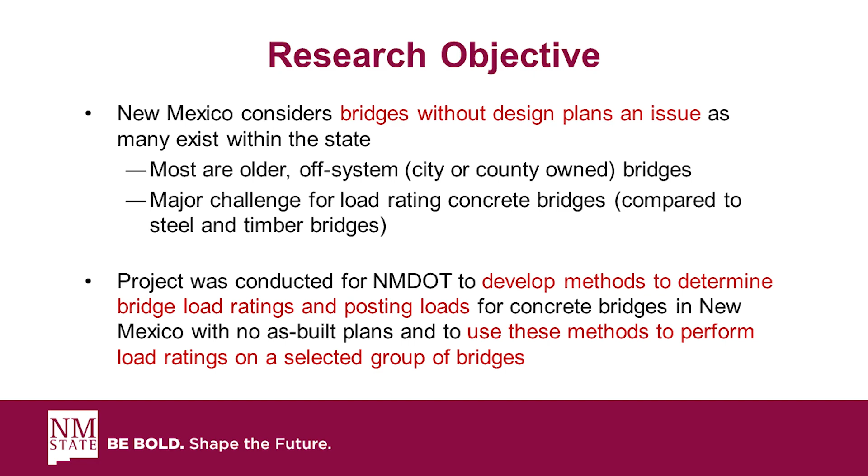The one thing we did do, we talked to New Mexico, and they considered bridges without design plans to be a major issue. Most of these bridges were older, off-system bridges, as I mentioned before. The major challenge rose with load rating concrete bridges without plans, and as you can imagine, it's because we don't know what the reinforcement is - it's hidden, and so that was a major challenge.

Bridges such as steel and timber are a lot easier to load rate because you can go out to a bridge site and measure the dimensions. You can go back to historical documentation and get a good feel for what the bridge is.

So what we looked at - we did some literature reviews, and during my time at the University of Texas at Austin doing bridge testing research, we found that a lot of state DOTs have made headway in testing bridges: diagnostic testing and proof testing. For those not familiar with those terms, diagnostic testing involves doing a load test at a lower truck load and then calibrating a finite element model. The issue is that when you calibrate the model at a lower load and extrapolate to a higher load...

Things like fixed bearings - that's a big thing whenever you're load rating bridges. Fixed bearings can actually contribute to load distribution, but it might not be there at a higher load level. So for pre-stressed concrete, we were looking at not only diagnostic testing but also proof testing, which essentially is loading at a much higher level and proving the bridge can carry a particular load.

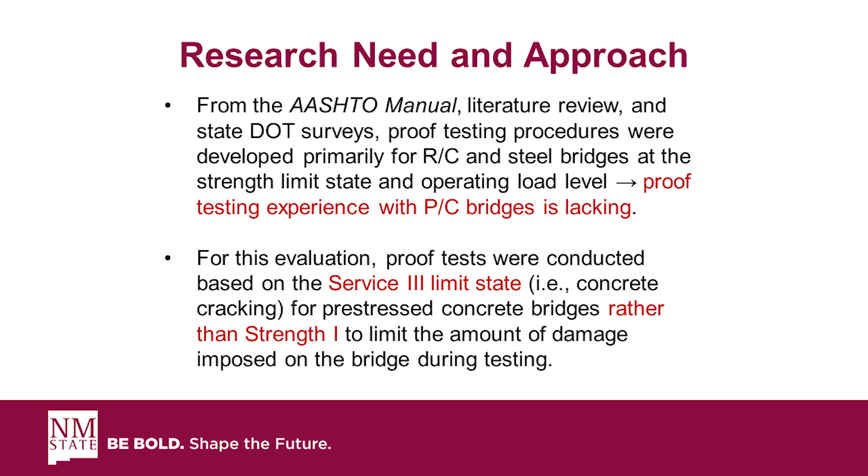The problem with prestressed concrete bridges, though, is that we don't want to load past the concrete cracking strength. That was the big issue for us, because the bridges we were inspecting didn't have cracks, and we didn't want to load past that serviceability limit state. So that's where we concentrated our load testing - we did all our proof testing based on Service 3, then extrapolated to Strength 1. I'll illustrate this with a case study we did.

Okay, so let's talk first about the general procedure that we followed.

Since we don't know what the reinforcement is, we estimated the amount of prestressing strands using Magnel diagrams - basically getting an estimate based on what an engineer would come up with in terms of prestressing strand estimates.

We then used a ferroscan, scanning the side of the beams to see what we could see inside as far as reinforcement. One of the challenges we had was that whenever you have 7-wire strand in prestressed concrete members, the ferroscan does not work as well as when you're looking for mild reinforcement. The strand pattern itself really creates some issues in getting the results.

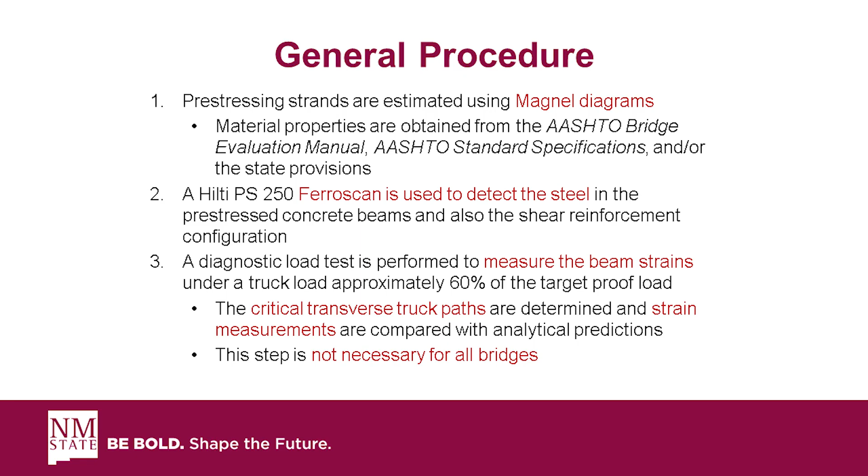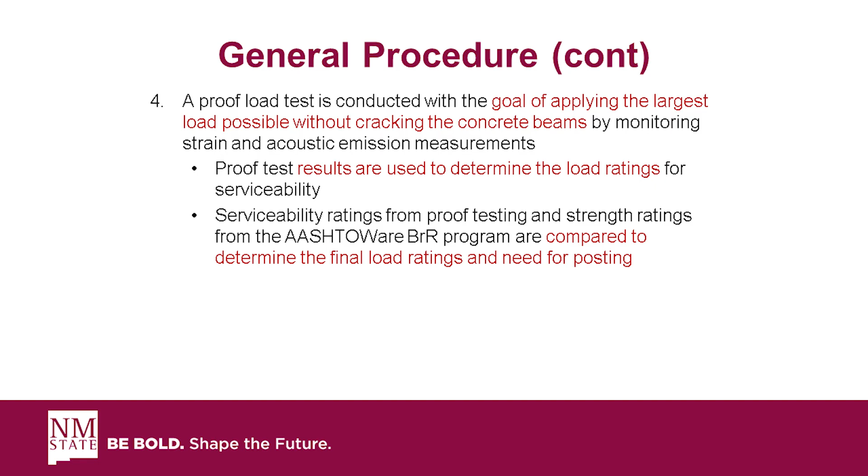Then again, we do our proof test, making sure we're monitoring the bridge behavior to ensure we're not going to get any cracking. Based off those proof test results, we're able to load rate the structure.

As far as bridges without plans, at the time of this study, back in about 2016-2017, approximately 10% of bridges in the US had no design plans - about 650,000 bridges located throughout the country, so that's about 60 to 70,000 bridges without design plans.

The ones we have here in New Mexico that fell into this category were T-beam bridges, box beam bridges, and I-girder bridges - you can see those listed here.

I'm going to be focusing mainly on Bridge 7701, which in this particular case experienced the most damage. Particularly, between the tops of the beams they had a shear key, and those were all damaged. As pointed out earlier in a talk on the UHPC retrofit of shear keys, in this case the shear keys were not even that well designed, which created some challenges for us when we load tested.

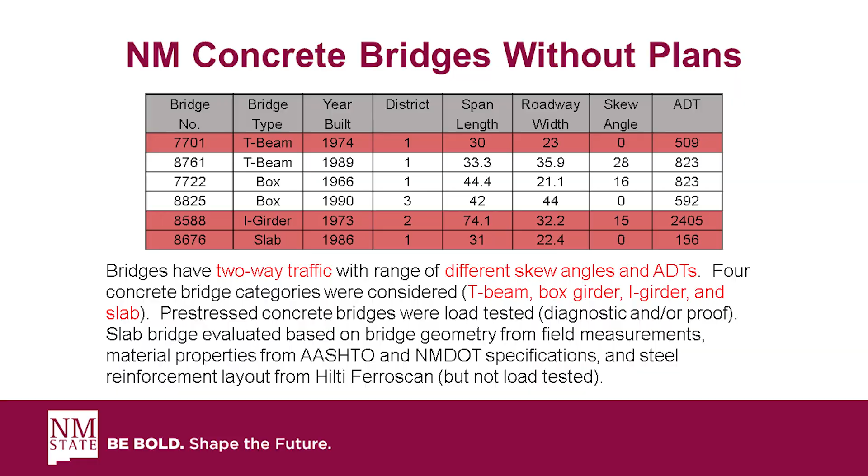We also did slab bridges - that's number 8676 towards the bottom there. For that one we were actually able to get a very good estimate of the reinforcement and load rate the bridge using the bridge rating program, BrR, the AASHTO program. I do have some publications at the end of this talk, so you can follow up if you're interested.

All right, so let's get right into it. Bridge 7701 was actually located in District 1, close to Las Cruces, New Mexico. This is a single-span prestressed concrete bridge, about 30 feet, and it has 9 T-beams.

We have shear keys located on the top of the beams, with 7 keys located along the length. As pointed out earlier, with the UHPC, it kind of corresponds to those staples going along the length of the girders. In this case, however, it was a very basic design.

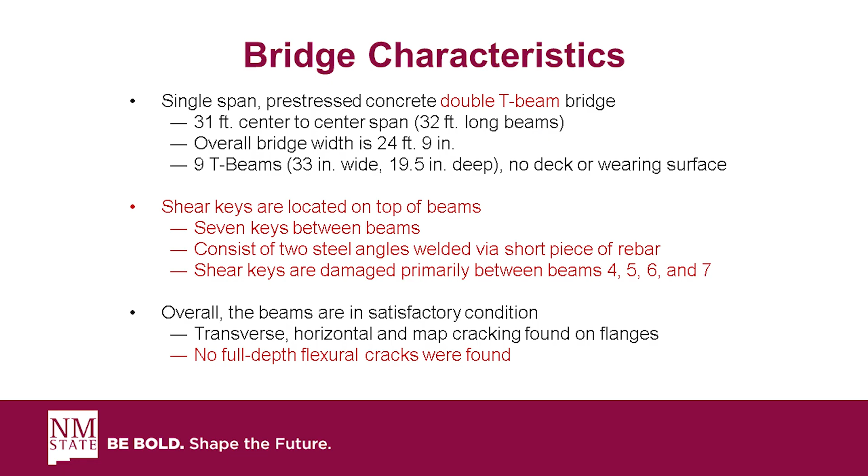It just included 2 steel angles with a rebar welded in between those two channels. We did a full depth inspection and found that the beams were all in satisfactory condition, and most importantly, no full depth flexural cracks were found, and obviously we didn't want to cause any new ones. So that was a big part of our plan.

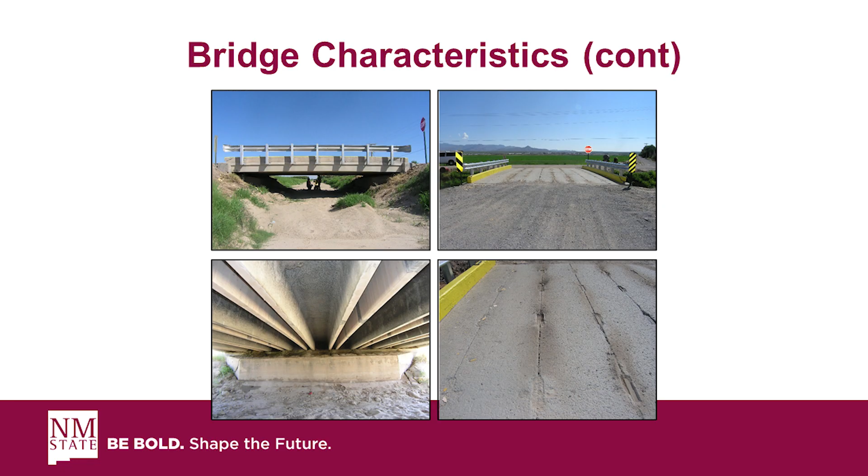So here are a couple of pictures. You can see the elevation view, but if you look on the bottom right, you see those pockets. Those are where the steel angles are located, and there was a rebar right between the 2 steel angles. On several of these bridges, it was broken.

So this particular study was focused on what is the load capacity of this bridge. A lot of them are located in agricultural areas where they're going over a canal, and a lot of farm equipment is being used to go over these structures. We needed to know what the load capacity is.

Moving on to the estimate of the pre-stressing strands, we looked at coming up with an estimate based on 4 conditions. If you look at the first equation, that is the force in the pre-stressing strand as a function of eccentricity, based on the stress at the bottom of the beam at transfer. So we're able to come up with a force estimate as a function of eccentricity.

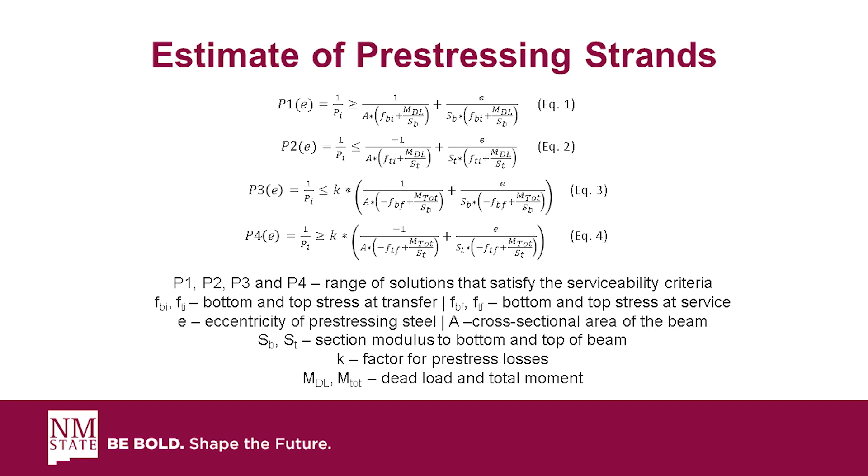The second equation is at the top of the beam at release, and P3 and P4 are at the bottom of the beam at service and on the top of the beam at service. The K factor is the factor we use for pre-stress losses, and for these tests we assumed 25% pre-stress losses for service.

These are the resulting lines. You see P1, which is our blue line. That is the estimate on the vertical scale, which is 1 over the pre-stressing force. So as you go higher in that quantity, you're actually getting a larger pre-stressing force, because you're going 1 over that value.

So if we bind that value, this is the region where you have pre-stressing force with eccentricity. The top point corresponds to the lowest pre-stress and the highest eccentricity. So how do we accomplish the lowest pre-stressing force? It's by putting as much of the steel away from the center of gravity as possible.

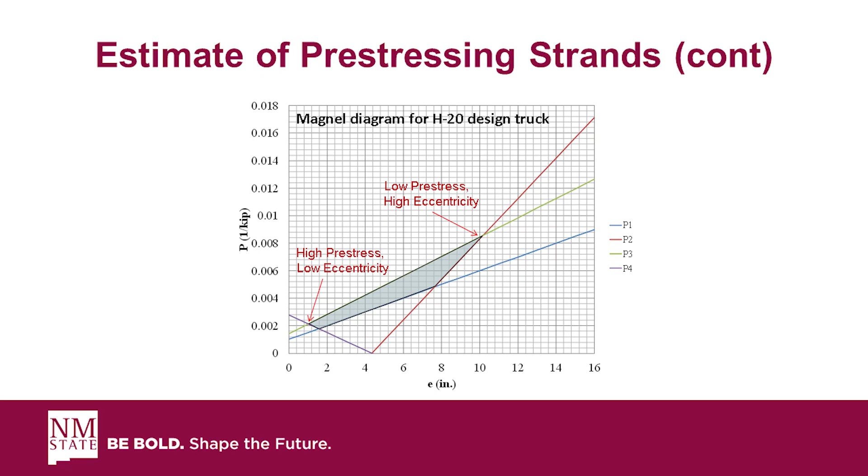So for pre-stressed concrete members, for example a bulb T, you want to start filling all the rows towards the bottom of the cross section and then moving up. So in this case, the higher the eccentricity, the lower the pre-stressing force. The bottom point represents the higher pre-stress and the low eccentricity. So really design is usually on the top point, the lower pre-stress and the high eccentricity.

So these are the results. We did this analysis based on HS20 loading, H20 loading, and also H15. The numbers that you see in red correspond to H20. Let's just go through those numbers.

If you look at the first number, the 8.56, that goes back to the previous slide, looking at that low pre-stress force. If you go to 1 over Pi, that is the 8.56. If we take an inverse of that, that means we need about 117 kips of force, and this is the amount of force you need to satisfy Service 3.

From there, we can move on and come up with the area of steel required, determined by dividing that force by 70% of FPU, which is basically the amount of stress you can put on the cable at transfer. We come up with 0.618, and if we divide that by 0.153, which is the area of a half-inch diameter strand, we come up with an estimate of 4 strands. So we really just back-engineered it to say that we need at least 4 strands.

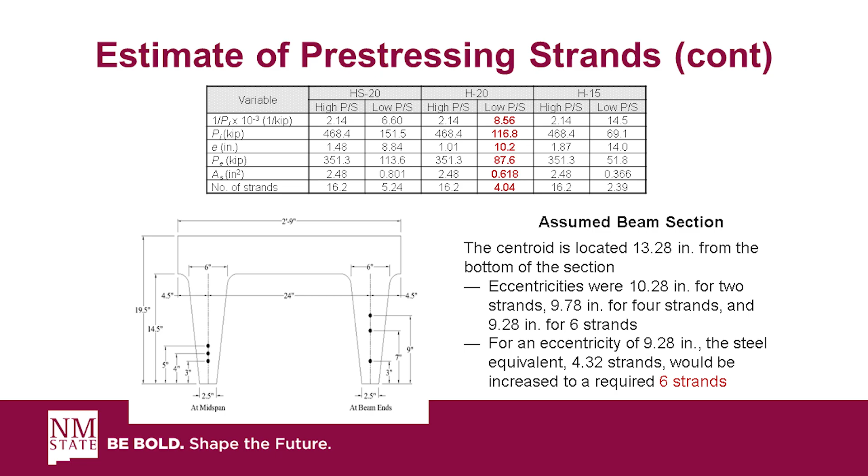With that value, what we did next is we did a scan of the beam using the Ferroscan. If you look at point B, that corresponds to the bottom of the beam, and that dark area you see is 3 strands that are bundled together.

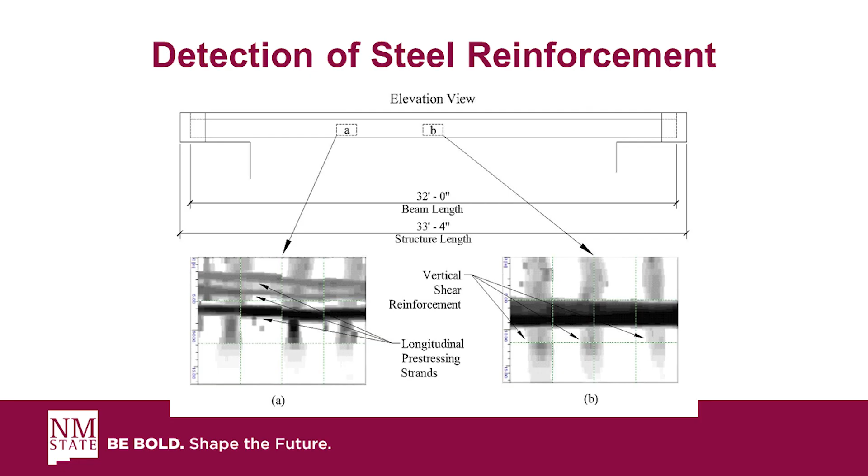As you move away from the center line towards the end of the beam, you get harping of the strand. You can see on the left the 3 strands that are separating. Going back to the previous slide, we said we needed 4 strands, but you're going to need a little more than that, so it could be 2 strands in each stem. We actually went up to 3 strands, and that's what we used as the estimate. So now we have a good picture of what the reinforcement is.

Now that we have the number of strands, estimated at 6, we were able to start preparing for our load test. We first determined the amount of moment that would cause cracking of the beam. We estimated the dead load moment based on the size of the beam itself, and taking the difference of those two, we figured out the available moment we can apply to this bridge with a truckload.

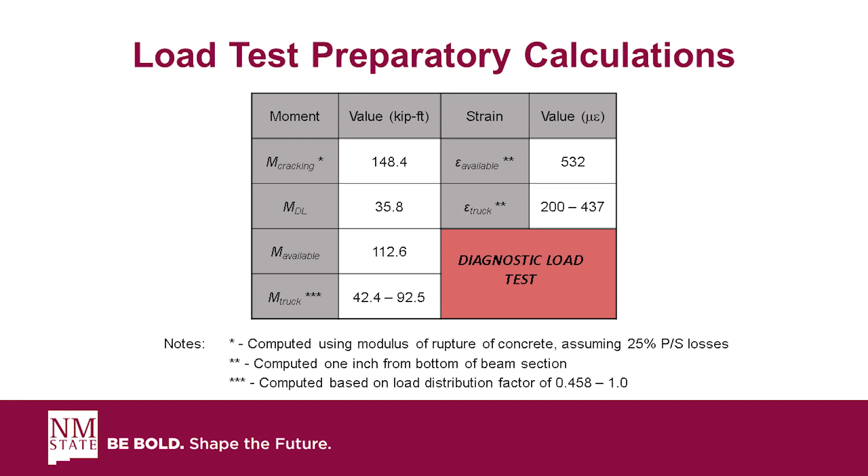It's about 112, 113 kip feet. The truck itself in our diagnostic test was going to range between 42.4 and 92.5 kip feet. The lower number is based on the distribution factor from the AASHTO specification, basically taking that 92.5 number times the distribution factor from AASHTO, shown here to be about 0.45. So just think of it like each beam taking 45% of the load.

We also did that estimate based on a distribution factor of 1. That goes back to what was mentioned earlier about the shear keys. When they're broken, each individual beam acts independently. So if you're looking at a wheel line, that beam takes load and doesn't distribute any load to the adjacent beams. That actually happened on this load test on a couple of different beams.

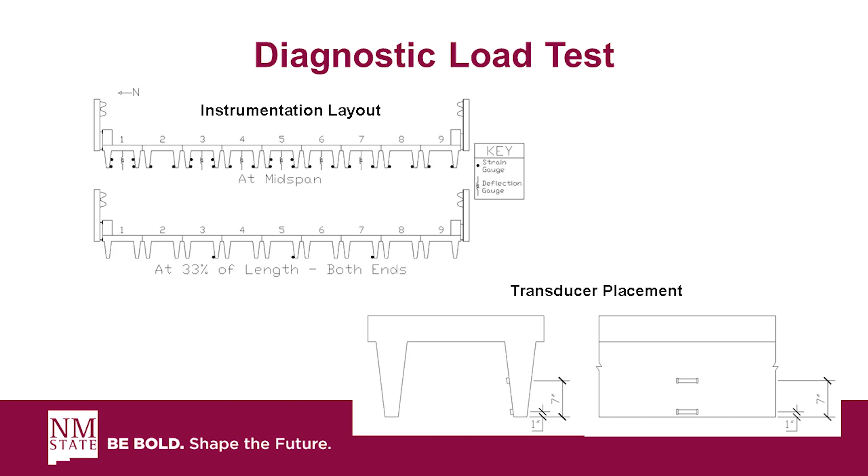This is the cross section of the beam where we put instrumentation. All those individual circles you see are where we put a strain gauge. We wanted to make sure we were monitoring each individual beam under the truckload we were going to apply. At certain locations we also put a strain gauge on the height of the beam, because we wanted to come up with a strain profile and estimate where the neutral axis was. That tells us if we had a gross section or a cracked section, and it confirmed that we had a gross section.

This is where the truckloads were positioned. If you see path 5 and path 7, you see the 2 arrows pushing down there - those are the 2 loads from the front axle, 2 wheels, 2 loads going down. So we drove the truck onto the bridge just with the front axle. Then on pass 1 and 5, and pass 3 and 7 on the second phase, we backed the truck up, gradually applying larger loads.

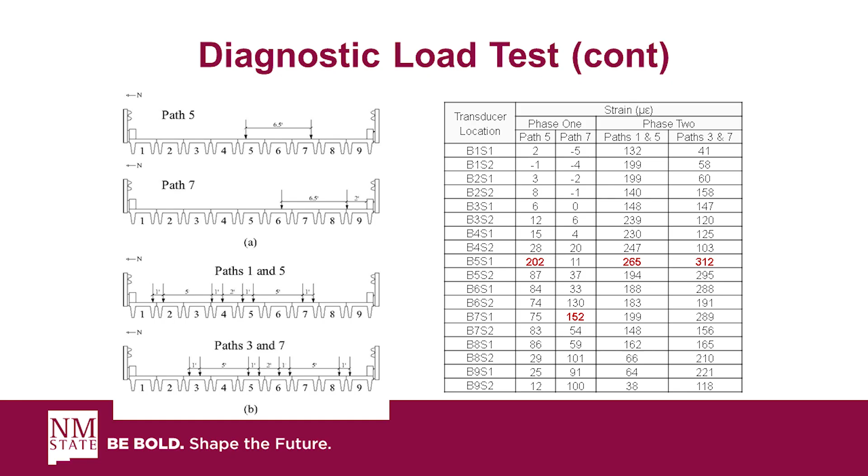Going back to the preparatory calculations, we had estimated the amount of strain available before cracking was 530, so we made sure the strain levels never exceeded that. Let's go back to the results here: we got up to about 312 micro strain, well below the 530 that would cause cracking. So we felt comfortable with this diagnostic load test.

And then we moved on to the proof test. We changed our instrumentation and identified 4 beams that were really taking up a lot of the load because of the damaged shear keys, and we instrumented heavily in those areas. We put a strain gauge on each side of the stem, so that way we made sure we were capturing the strain differential across the stem. We wanted to make sure we did not crack the beam.

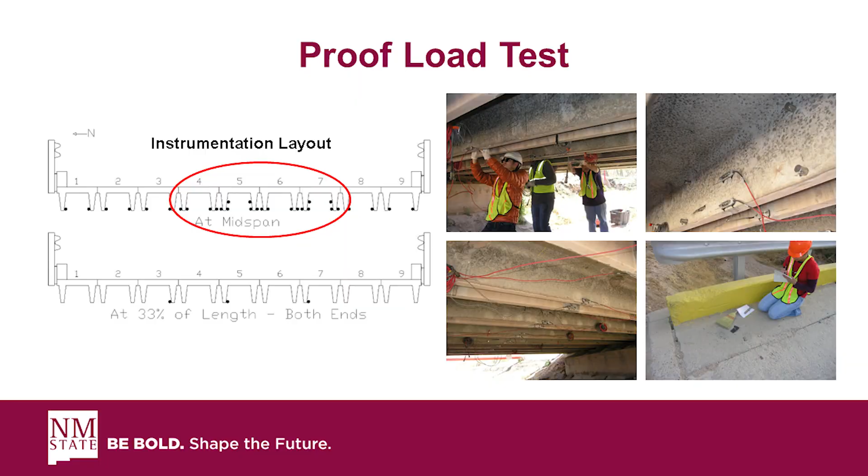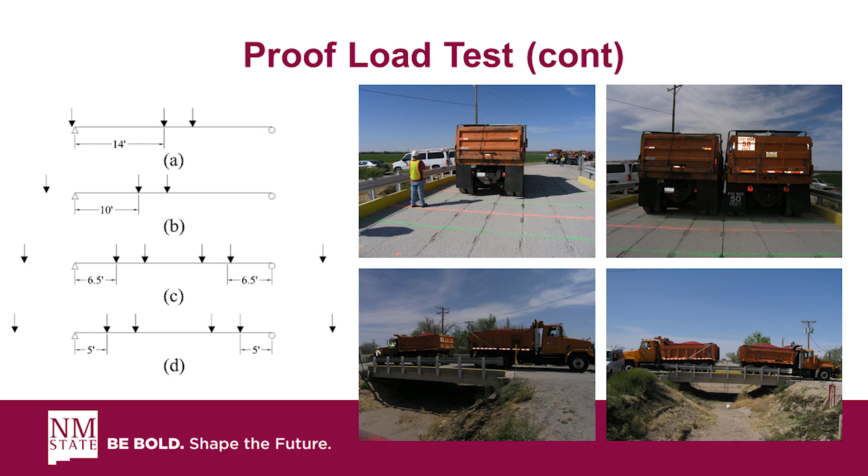Bottom left would be 2 trucks back to back, and the bottom right is 4 trucks on the bridge. This is the largest load this bridge has ever seen. On phase 1, on the left, we were able to back up the truck all the way up to 14 feet, all the way to the middle.

On 2 trucks back to back, we were only able to go up to 10 feet. We stopped the truck because we had already gotten close to the available strain. On phase 3, we were only able to get to 6.5 feet, and on phase 4, we were only able to get to 5 feet, where we started getting close to the cracking strain.

Another thing we made sure we did is we wanted to make sure we did not fail the beam in shear. There was an equation given in NCHRP report 549, simplified design procedures for pre-stressed concrete members. They come up with an estimate of VCW, which is the cracking load for the web. We estimated that the amount of force required to crack the beam was somewhere between 27 and 42 kips. Our largest applied load was estimated to be about 26 kips. So that gave us extra assurance that we weren't going to crack the beam in shear.

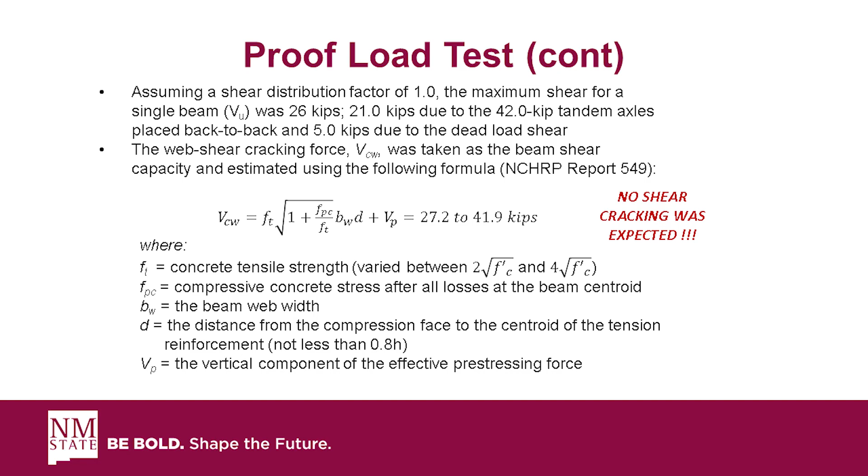One thing I want to get across is that we made several checks. We were looking at checks for flexure, for cracking, for shear, and all of this took a great deal of investigation to feel confident that we were not going to get anything unexpected.

Going back to this, we also had to console the truck drivers when they were backing up the truck, because the beams were deflecting so much that gravel on the bridge deck was actually falling through the joints between the beams. There was a lot of deflection, and they were asking us, is it safe to continue? And we were saying, yeah, we're really confident, while keeping our fingers crossed behind our backs.

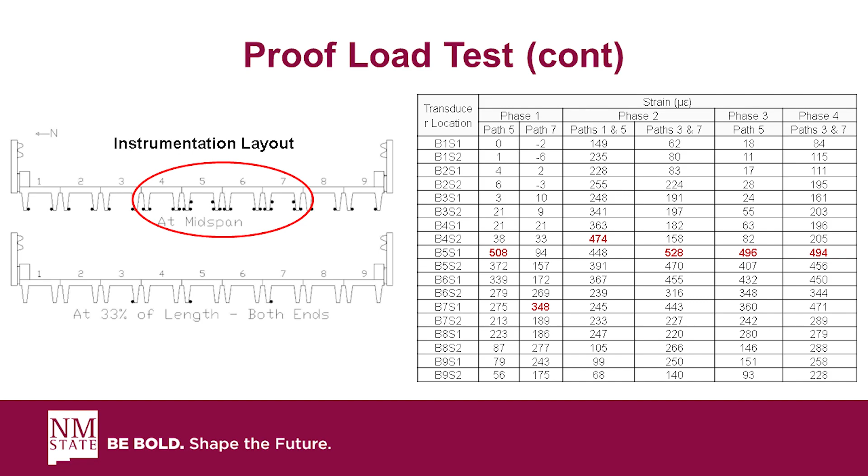With that, the last thing we did was the final load rating. We followed the AASHTO Bridge Evaluation Manual. It gives you an equation for the target moment, which is basically the load factor times L sub R, the amount of moment we would have to apply corresponding to the legal load. Then we multiply that by 1 plus impact, which we took to be 33%.

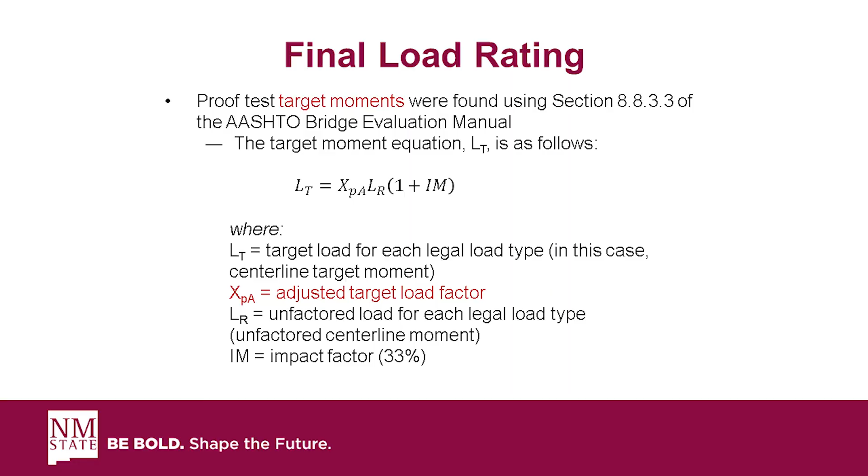So think of it like this: when you're designing, you have a load factor, you have your legal load, and then you have 1 plus impact. So what we're doing is trying to actually apply that level of load to prove the bridge can carry it, through a load test.

Some of the adjustment factors we have to apply: one is for one lane loaded, and for those of you who have done bridge design, you know that's for the multiple presence factor. Whenever you have one lane loaded, there's a possibility it's going to be larger than the legal load, so that's where you get the 15%.

We consider this structure to be non-redundant because of the damaged shear keys, so if one beam fails, it's not going to be able to redistribute the moment. We also did an in-depth inspection, and our daily truck traffic was less than 1,000. With those adjustments made, for one lane loaded our load factor was 1.1, and for multiple lanes loaded it was 0.95.

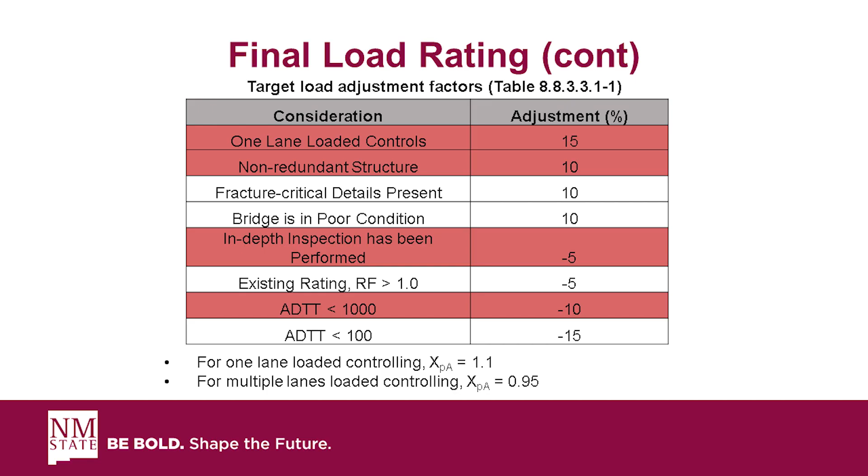Our final load rating factor is determined using this equation. You have K sub naught, the factor considering how the proof test is terminated, and you'll get a lower value than 1 if you actually go into nonlinear behavior. We did not get into nonlinear behavior; we stopped it before we had cracking.

We never reached cracking. You see that the rating factor is a ratio between what you actually applied to the bridge and what your target was. So, for example, if you have a target moment of 500 and you were only able to apply 250, that's a rating factor of half — as simple as that ratio.

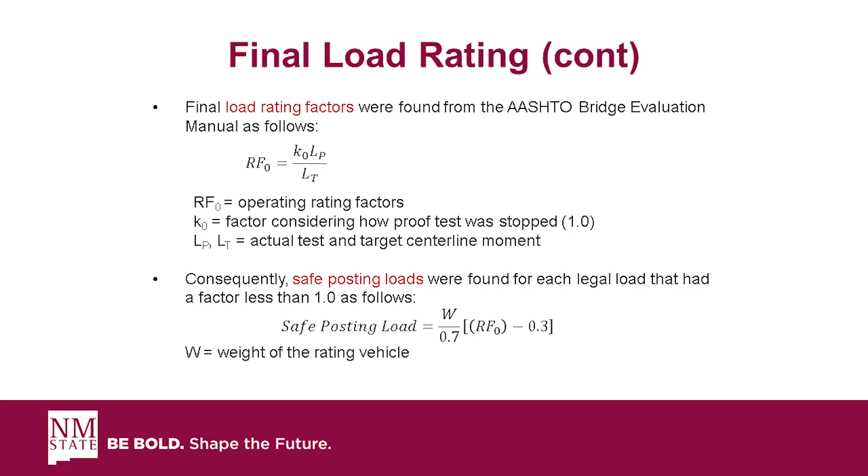On the safe posting load, you have the weight of the rating vehicle times the rating factor minus 0.3, divided by 0.7. This equation basically says that for any rating factor less than 0.3, you're not going to allow any trucks on that bridge — it's a lower limit for what you're going to allow to cross the structure. And these are the results.

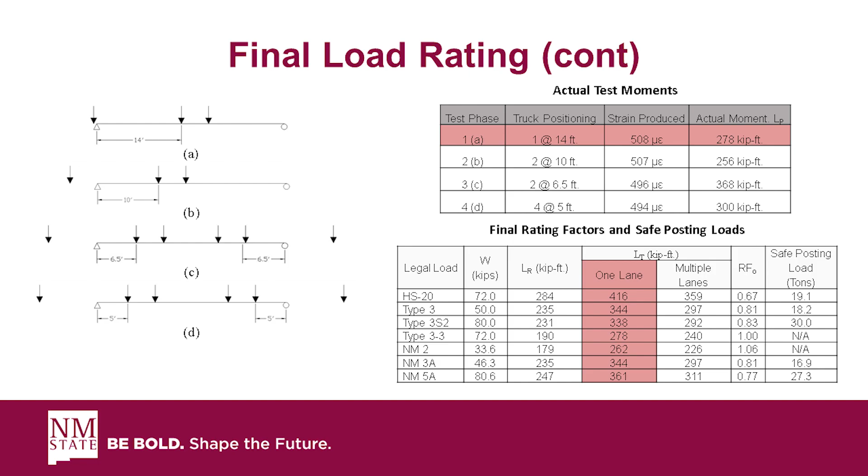We also computed what the moment was for all our legal loads, ranging from Type 3 all the way through the state vehicles of New Mexico 5A. Our rating factors range between 0.67 all the way to 1.06. So for certain legal loads, we did have to load post the structure, and in this case you could see it's Type 3, the Type 3S2, New Mexico 3A, and New Mexico 5A.

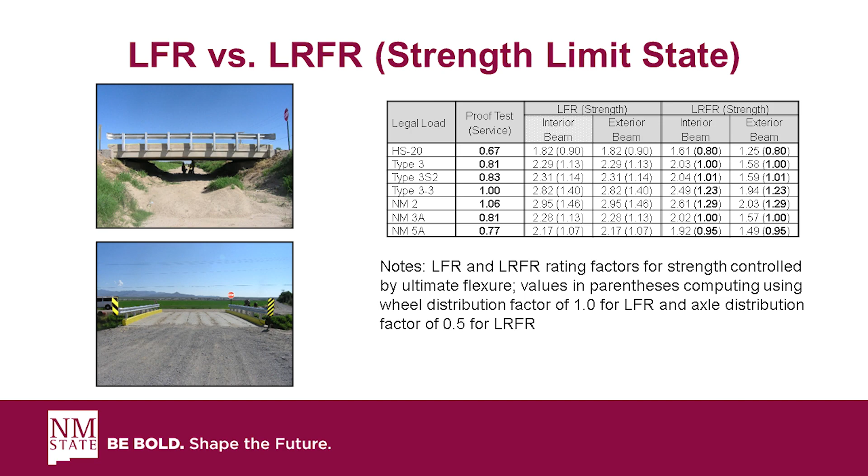Everything you see on this figure is all based on the proof test. We also went ahead and went through a full bridge rating using the AASHTO BRR program, using our estimates on the pre-stressing. What we found at the strength limit state, it was controlled by ultimate flexure, but all those ratings exceeded what we got from the proof test, so that gave us confidence that these rating values were conservative, and we were able to feel confident with the posting limits.

So just a summary of what we found. The literature review really provided very little guidance on proof testing of pre-stressed concrete bridges without plans. If you look at the AASHTO manual for bridge evaluation, it's really on steel bridges and reinforced concrete. There's nothing related to pre-stressed concrete.

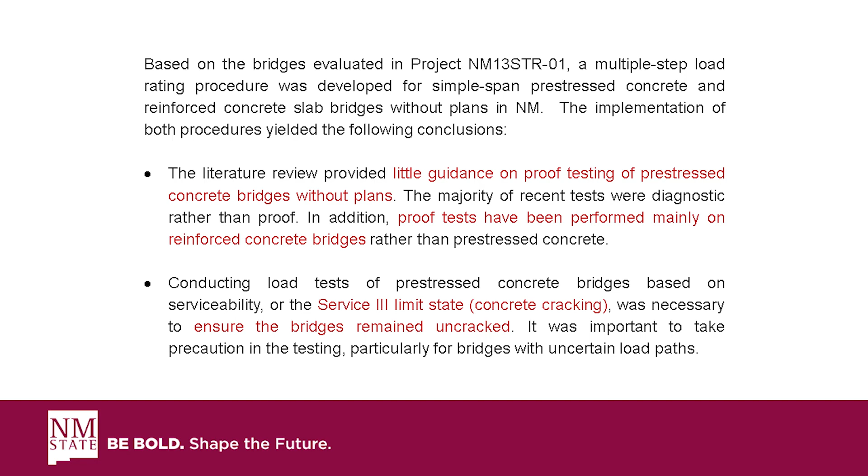It's valid to use the service 3 limit state to actually plan your load test. Diagnostic load testing is very helpful in getting an understanding of your bridge behavior, which can then be used to properly plan your proof test. Monitoring strain was very effective.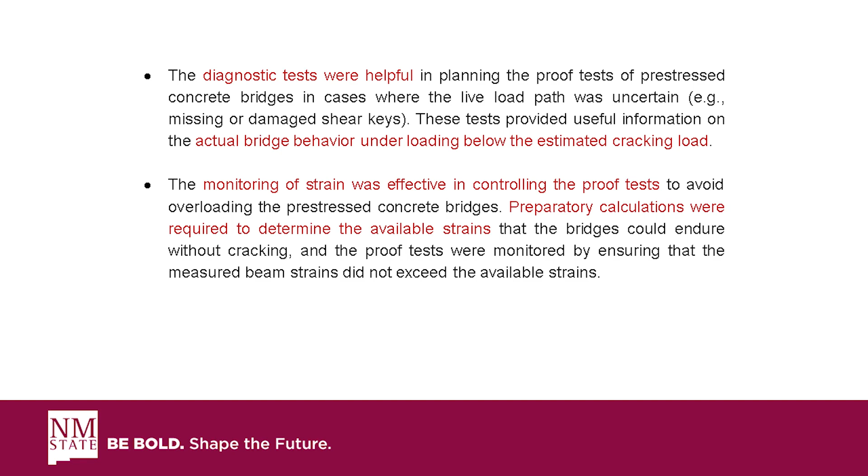By the way, I've only shown one bridge test we did. We actually load tested 6 bridges, all of which were kept below the available strain and did not experience cracking.

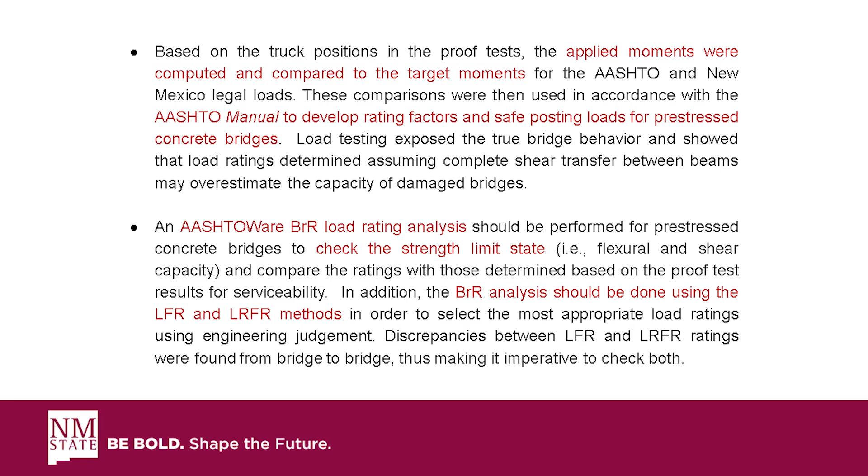And then finally, the applied moments that we get from the AASHTO and New Mexico loads, we compared those to the target moments to come up with our safe posting level. And it's always important to do your final rating based on strength, to make sure you are not missing anything related to the ultimate strength category.

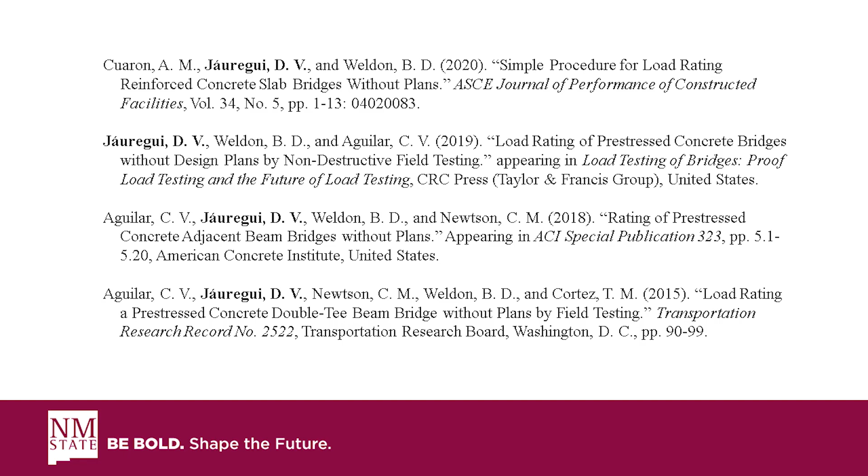Yeah, I think we have some time for questions. We're going into a peer breakout, so we probably have a little bit of time for questions if you want. We've got one in the back here.

Dr. Jauregui, regarding the rebar scanning, it's been about 6 or 7 years since you did this, and one of the problems back then was seeing those blobs, exactly what they were, whether they were several strands or measuring exact size, and that's the part of this I was most excited about, being able to look at the rebar and detect the rebar. Has the technology improved any in the past couple of years?

Well, I think one thing I did find is that it has a much higher accuracy for mild reinforcement. For pre-stressing strand, because of the configuration, the 7-wire strand, it doesn't have a consistent cross section, so as you move along the length of the strand, it's changing as far as what it's actually scanning. One more thing, of course, one of the problems was when you're scanning a slab bridge, you were able to determine the rebar at the bottom because the cover there was only about an inch.

But as far as the rebar on top, where you may have 2 inches of cover, you had difficulty there. Has that improved any? Well, I can't really speculate on that—the work I've done, we haven't really done much more on it. But there are certain challenges, particularly for continuous span slabs where you have a larger cover. Just as important as that is gaining access. You have to be on top of the deck to scan it, and you can't do that whenever you have traffic. It requires closing the bridge down in some form or fashion.